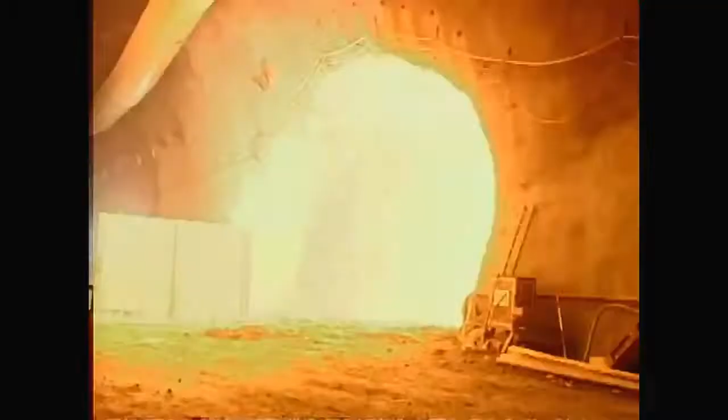The risky plan to redirect the crush of Europe's traffic and cargo not over the Alps, but under them. To do this, miners will have to punch their way through some of the hardest rock on Earth. It will take the largest drilling machines on this planet, each more than 3 stories high and longer than 4 football fields, drilling 24 hours a day for 6 years to get the job done.

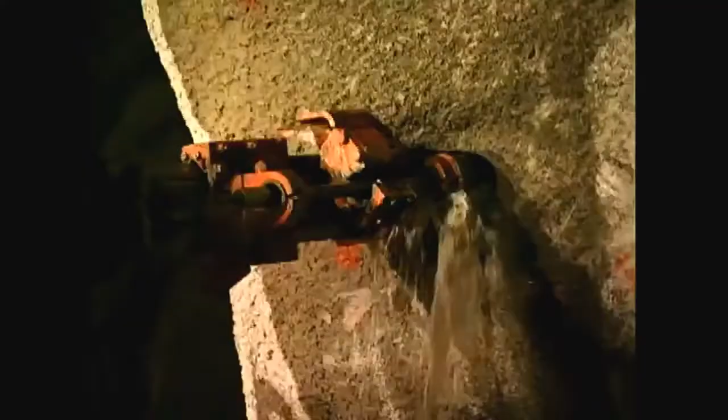The project is incredibly dangerous and outrageously expensive. The price tag, $7 billion. Can it be done? Or will unforeseen problems bankrupt the project before it's finished? Will engineers be able to avoid the horrible fate of so many other tunnels? Fire, disaster, and death.

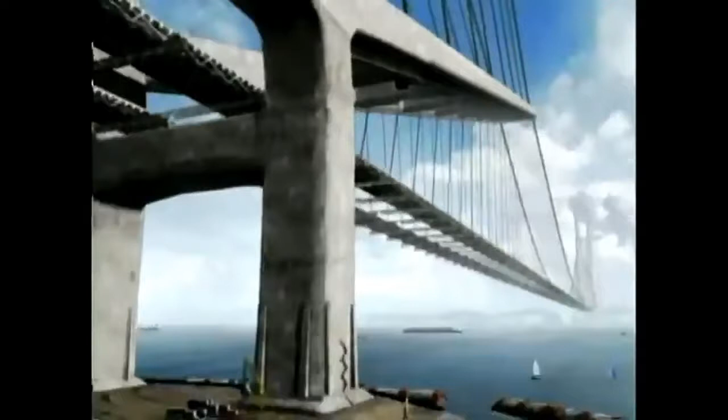To the outside world, Switzerland is a picture postcard. But the reality is not so pretty. Because of Switzerland's central location, each year 14 million trucks and cars coming from every corner of Europe pass through Switzerland on their way elsewhere. The sheer volume is fast turning this country into the biggest traffic jam in the world.

An obvious solution: put more freight and passengers onto trains to reduce the number of trucks and cars on the road. But it isn't that simple. The antiquated railway system is already jammed to capacity. In 1998, Swiss voters decided that something had to be done. So they voted to authorize a whopping $21 billion for a mammoth project. A high-speed rail network to be built under the Alps, connecting Switzerland to the major cities of Europe.

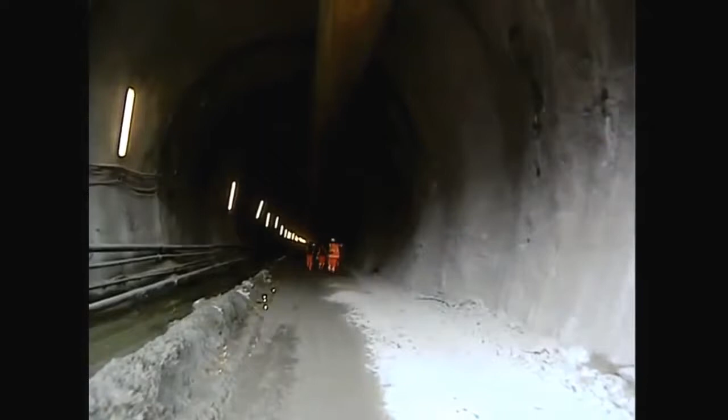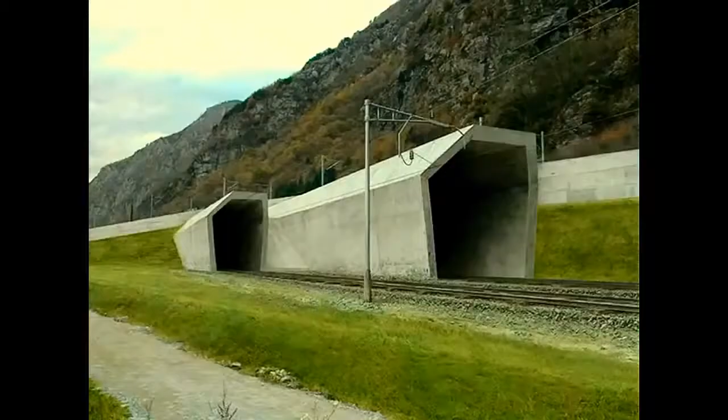The scale of the proposed project was staggering. It would require 2 separate tunnels, each one far longer than any mountain tunnel ever built. The shorter of the tunnels, named Lötschberg, would run for 21 miles under the mountains in southwest Switzerland. 50 miles to the east, an even longer tunnel would run 35 miles through the Alps. Since it would run directly under a mountain range named Gotthard, it would be called the Gotthard Tunnel.

3 times longer than any other mountain tunnel in the world, the Gotthard Tunnel alone will cost $7 billion. Enough to have built the Golden Gate Bridge 17 times. The tunnel's path will be straight and flat, right through the base of the mountain range. This route will let freight trains race through the mountain at 100 miles per hour, more than double their current speed. And passenger trains will go even faster, up to 155 miles per hour.

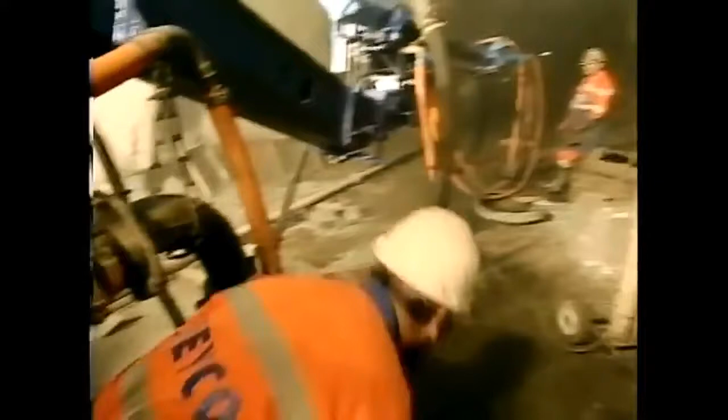Swiss voters were sold on the benefits of the proposed project, but they were also worried. They insisted that designers come up with plans to minimize the project's potentially devastating environmental impact. So the contract approved by the voters put enormous pressure on the engineers and the contractors. First, there was the guarantee. The engineers would need to certify that the tunnel would last at least 100 years. That meant that literally every material used in the tunnel would need to be subjected to the most rigorous testing in history. But that wasn't all.

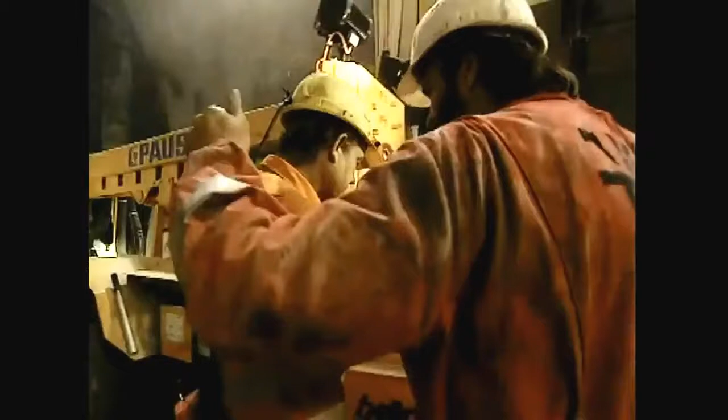The contract also called for the tunnel to be built fast. And if the builders made mistakes that put the project behind schedule or over budget, they would risk paying stiff financial penalties. We're not allowed to forget cost and time scheduling. Those are very risky things. We just got to keep all of that in control, and everybody's just really aware the whole world is watching us, and we've got to get everything right.

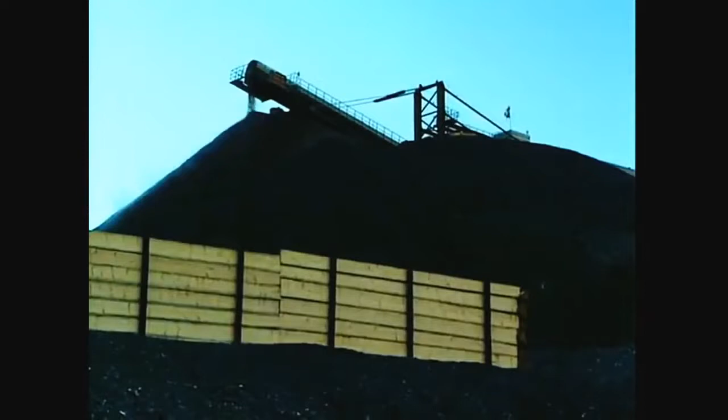Even without these added pressures, the Gotthard Tunnel project would still seem like an impossible task, just from the scale of the work itself. The miners will have to dig 24 million tons of rock out of the Alps, an amount that would fill over 16 football stadiums. Working conditions are extreme. Because the tunnel lies so deep underground, temperatures inside can reach 115 degrees. The miners work in near darkness and breathe thin, dusty air.

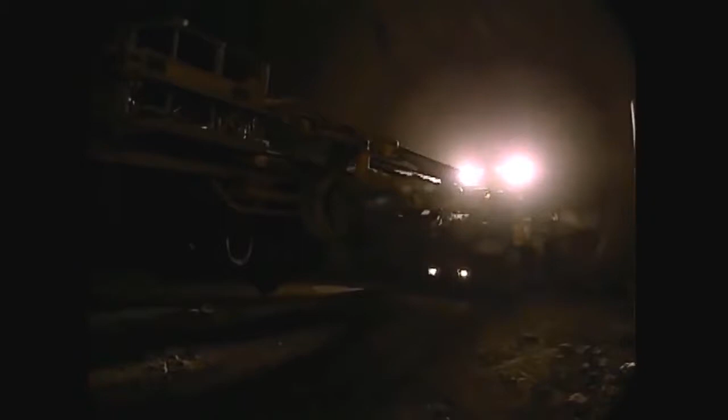Every day, they put their lives on the line. The biggest danger is lack of oxygen. In case of emergency, fire, explosion, the first thing that goes is the oxygen to breathe, because we're underground. We've got dumpers, we've got excavation machinery that move back and forwards. They're just moving around all the time. It's dark. Drivers don't see people walking around behind, and it could be if they reverse out that somebody gets hit by machinery.

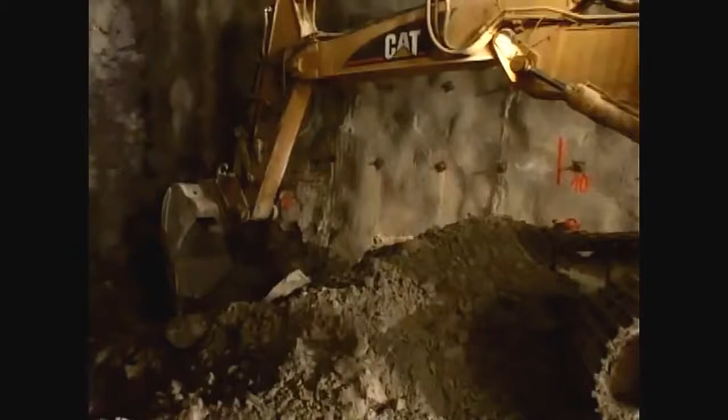And the dangers don't stop there. Tunneling, after all, is a battle between man and the earth itself. Cave-ins are a constant threat. To minimize the risk, geologists take samples deep inside the mountain before any drilling begins, to find out just what kind of rock the drillers might encounter.

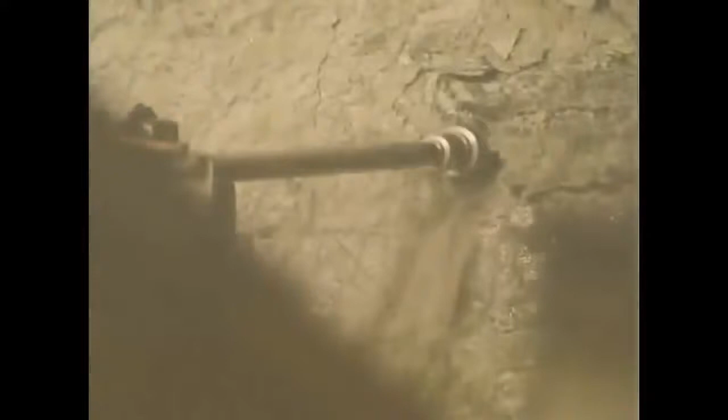A lot of sections we have rocks like this, real hard, gneiss, granites, where we go through by a tunnel boring machine. The tunnel boring machine, or TBM, designed for the Gotthard Tunnel, can chew away at hard rock. But if the miners encounter soft or unstable areas, they have to use a different method. The rock must be drilled and then blasted out.

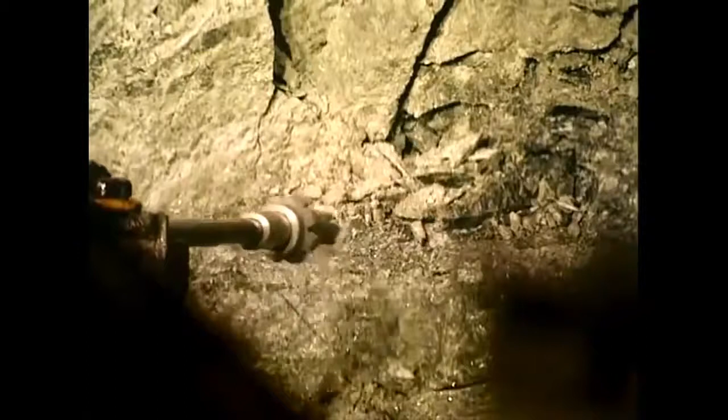And in areas where there are high-pressure water zones and crumbly rock, none of these methods can be used, and the danger increases exponentially. In 1996, during the initial surveys, geologists discovered such an area, sitting near the path of the proposed tunnel. The geological team taking core samples got hit by a sudden, powerful explosion of sand and water.

It's like you're in a submarine, 3,000 feet under sea level, and you drill outside into the sea. You hope that the water doesn't come into the submarine. So it's really life dangerous. Fortunately, no one was killed in the accident. But the incident threatened to stop the project in its tracks.

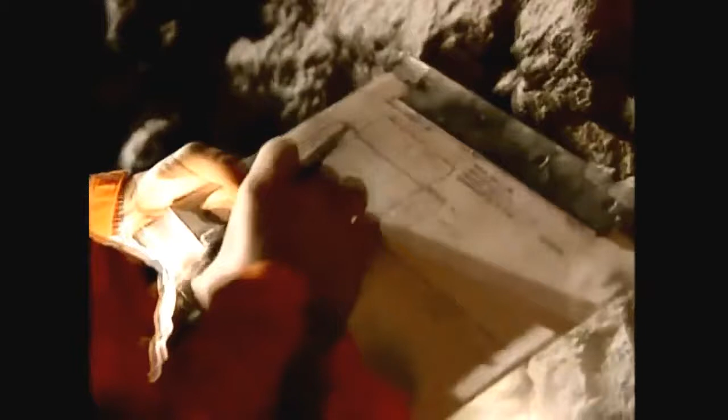The engineers estimated that stabilizing the area would cost an extra $600 million. That money simply wasn't in the budget. It took another half year of drilling deeper down before the geologists found a route that avoided the danger zone. And then we found a totally different rock. We found a marble. So this is not a difficult rock, so we can go through by TBM.

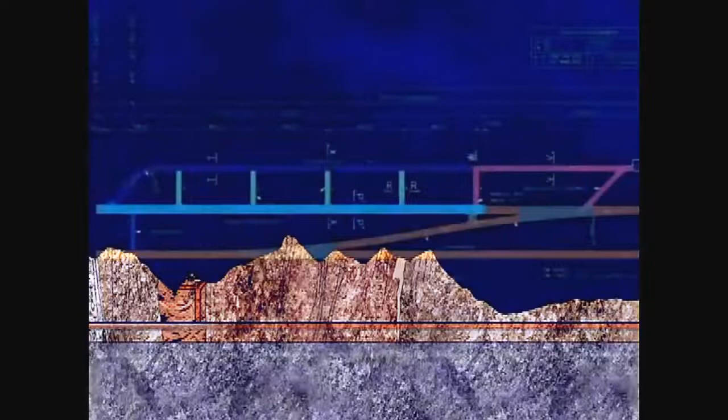Now that a safe path through the mountain had been determined, the design team could move on to their next big decision. What would the tunnels themselves look like? A single large tunnel with 2 sets of tracks inside would be the cheapest solution. But this design had a fatal flaw. If a train derailed inside the tunnel, it could hit an oncoming train or block the tunnel in both directions.

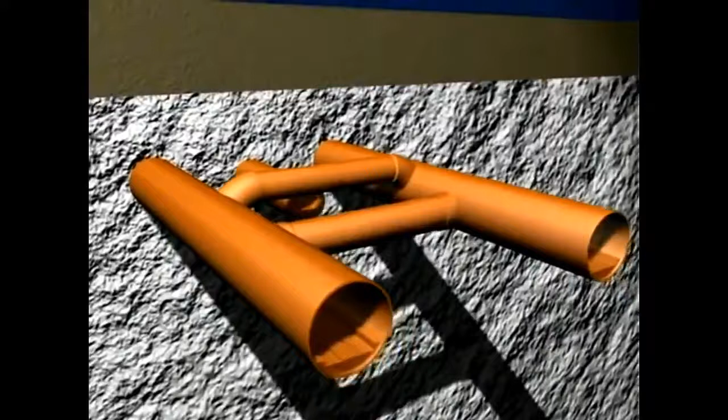A safer alternative would be the 3-tube system, like the one used in the Channel between France and England. The Channel has 2 single tunnels, one for each direction, and a smaller central tunnel for emergencies. That third tunnel proved a lifesaver on November 18, 1996.

That evening, a train carrying several trucks entered the tunnel on the French side. The conductor was unaware that one of the trucks had somehow caught on fire. At the time, there were 6 trains in the tunnel, including 2 passenger trains. 12 miles inside, the conductor brought the burning train to a dead stop.

He tried to get the passengers out, but the smoke was so thick they could barely see the exits. Eventually, they were able to make their way to the safety of the central emergency tunnel. They were very lucky. The fire was so intense in the tunnel they had left, it melted part of the concrete lining. 2 people suffered serious smoke inhalation. But thanks to that central emergency tunnel, nobody died.

The lesson was clear. Tunnels will always be dangerous places, but a good design can reduce the risks. You will never get a completely risk-free tunnel. You have to design it to cope with the foreseeable risks that might be faced. But at the end of the day, there are certain things called emergencies in which you have to have an emergency plan, whatever the situation you have.

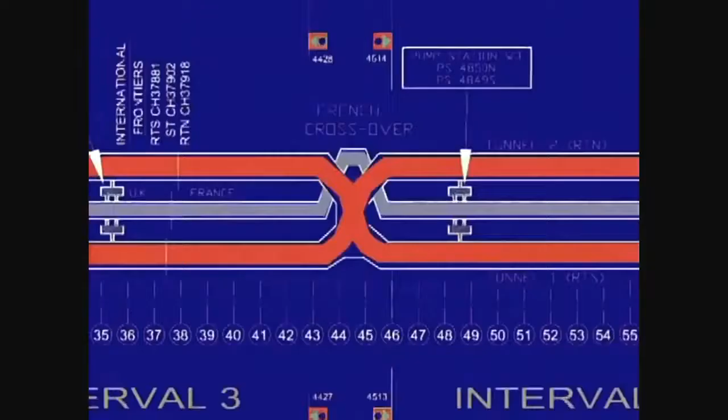The Swiss engineers carefully considered the pros and cons of each design. The single-tube system was clearly too dangerous, but the 3-tube system was far too expensive. So they came up with something else, a double-tube design. Separate tunnels going north and south that would reduce the risk of a head-on collision.

To enhance safety, they added passageways every 1,000 feet. These would allow emergency crews to move between both tubes. 2 crossover points along the track would allow trains to switch from one tunnel to the other in an emergency. The designers added another crucial feature, a series of small passageways connected to an escape route that crosses over to the other side. Each tube would have 2 of these emergency stations.

If a fire were ever detected, the computers in the command center would guide trains directly to the closest emergency station. Passengers would then evacuate the train and make their way to safety. A pair of massive ventilators at the portals would bring in fresh air and push out the smoke. On paper, this is perhaps the safest railway tunnel ever designed. But until it's tested, no one will know for sure.

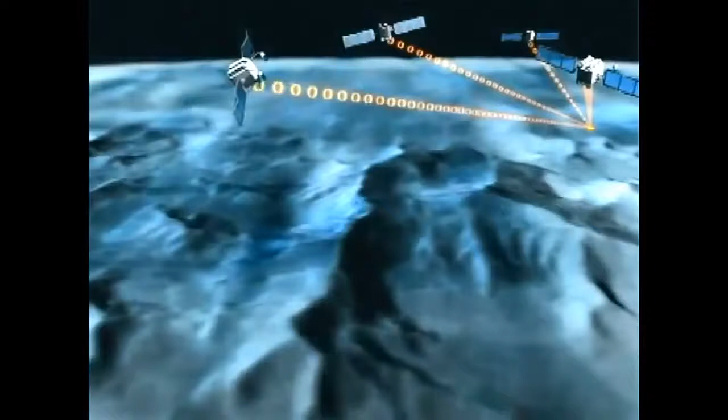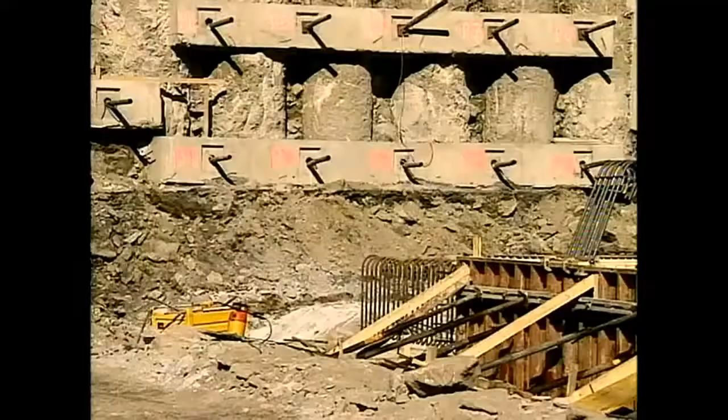The plans were complete. Now the real work could begin. Base camps were set up to launch the attack on the mountain. Because the job is so enormous, the engineers plan to enter the mountain from 5 distinct starting points. It's a new system or a new way to excavate such a long tunnel. It would have taken us about 20 years to meet up because it's so long. With these measures of attacking with 3 intermediate attacks, we've speeded up the whole excavation phase by about 6 to 10 years.

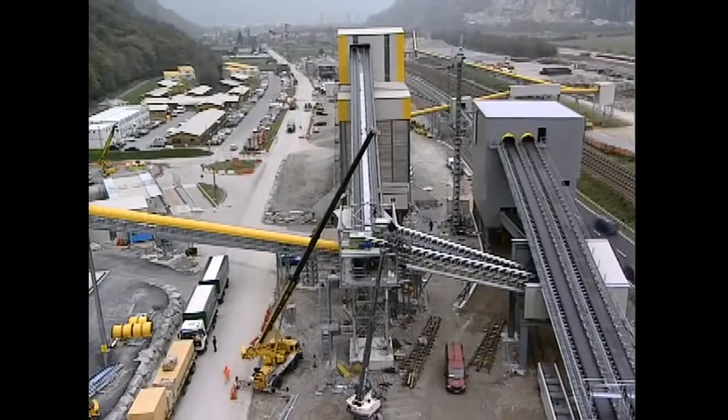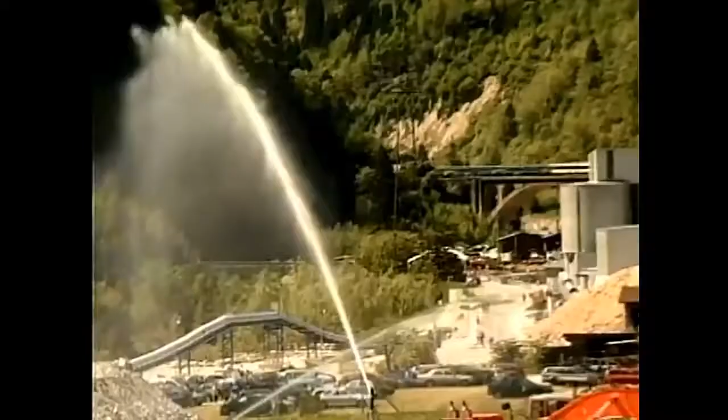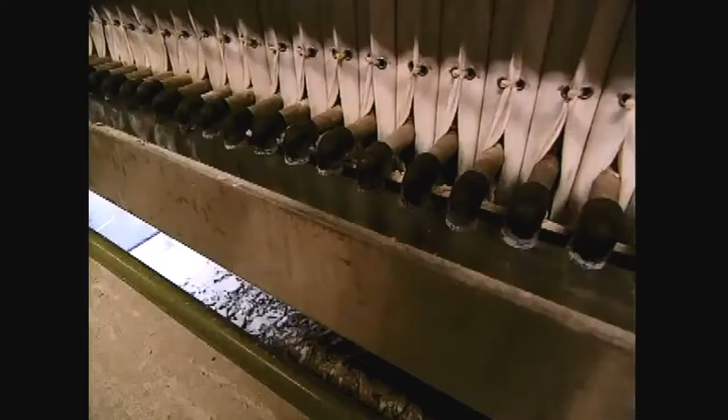Each starting point would have its own base camp, complete with concrete factory, water treatment center, living quarters for workers, cafeteria, even a mass transit system. The base camps would play a crucial role in keeping environmental damage to a minimum. A major concern was water. Drilling would contaminate huge quantities of pure mountain water that had been locked inside the mountain for millions of years. Water treatment plants at each base camp would filter out contaminants and then channel the water to nearby rivers.

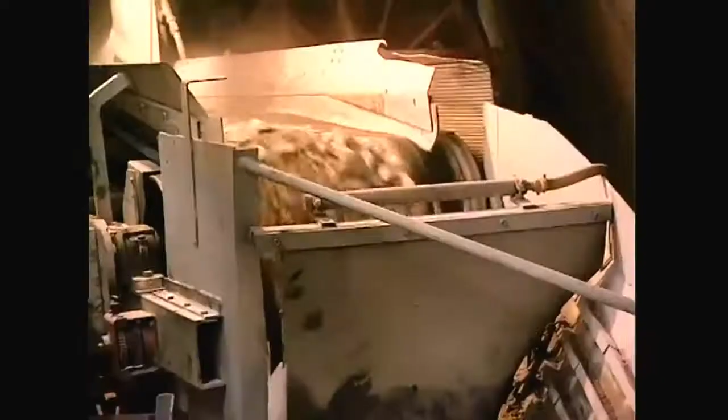But an even greater concern, rock debris. What could be done with the 24 million tons of rock the miners would carve out of the mountain? They came up with an ingenious plan. Recycle it back into the project. Concrete factories at each site would transform the rock to produce the 7.5 million tons of concrete needed to line the tunnel walls. That's enough concrete to pave an 8-lane highway 300 miles long.

Once the facilities were in place, project managers could start bringing in manpower. 1,800 workers were brought in from all over the world. Among them, the world's best technicians, explosive experts, and heavy machine operators. With the army in place, the full-scale attack on the mountain could begin. Their first task, build access tunnels into the rock. These tunnels are needed to get the workers and equipment to the actual work site deep inside the mountain. The workers would enter the rock in trains, buses, even an elevator.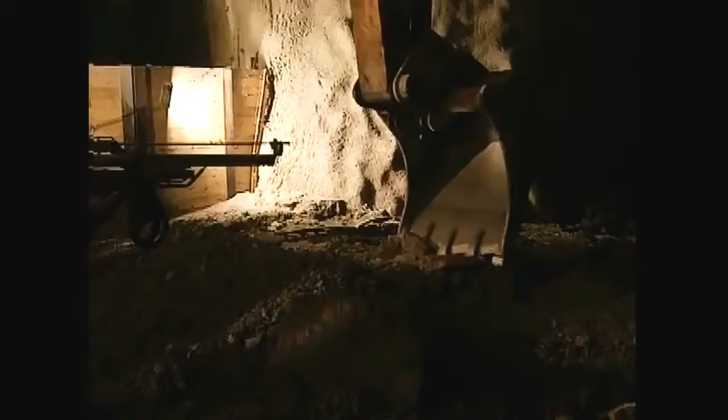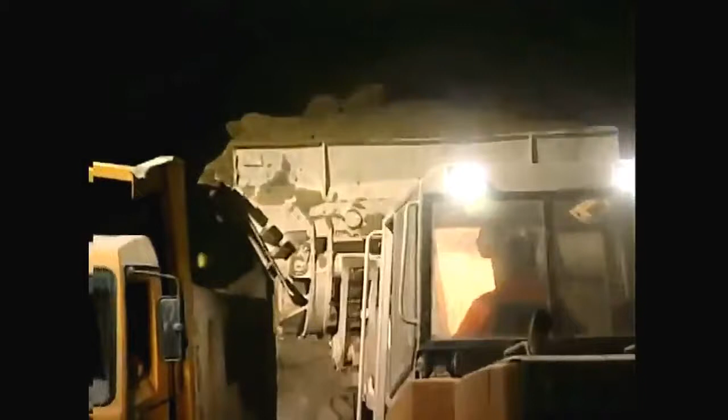The schedule required work to go on around the clock, 7 days a week, for 12 years. Drilling, digging, blasting. Just to make the deadline. But even at that pace, the project would be completely impossible without this. This is one of the biggest tunnel boring machines in the world. It's a drill with a drill bit 30 feet in diameter, designed to bore a tunnel through some of the hardest rock in the world.

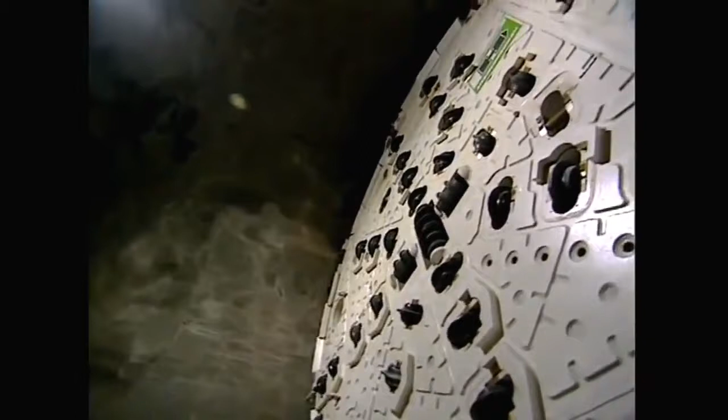How big is it? 3 stories high, 4 football fields long. At full throttle, it can advance through 130 feet of solid rock in a day. But even this gargantuan machine had never been tested under these conditions. Could it withstand 6 years of constant grinding? To improve the odds, the engineers had to arm the machine with the best possible weaponry, custom made for the job.

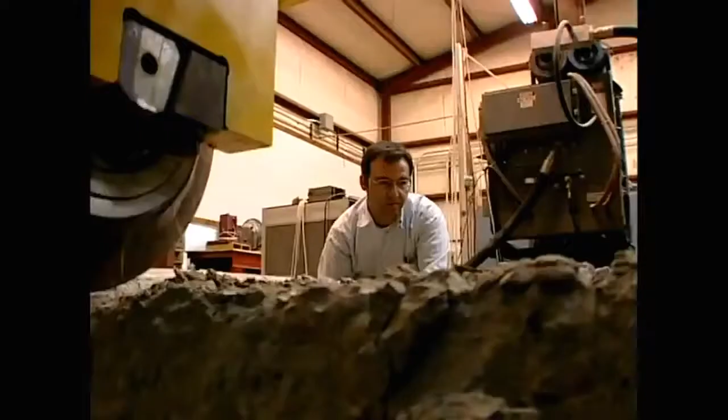The best custom drill bits for tunnel machines are designed here at the Colorado School of Mines. Looks like you are getting some overbreak over here. Where researchers test individual cutters, the steel alloy rollers that actually grind the rock face.

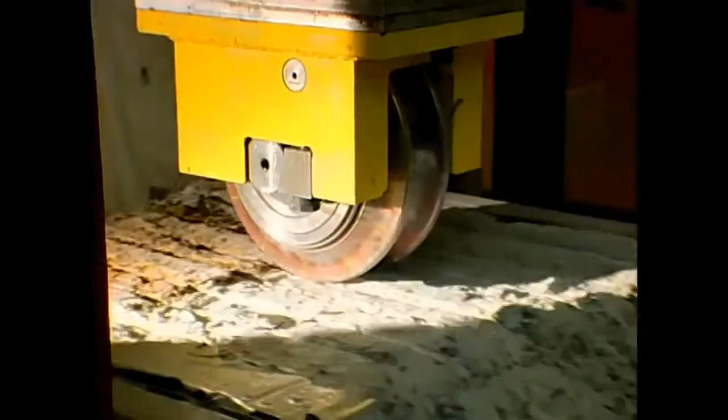To guarantee each cutter is best suited for its job, a rock sample from the tunnel site is placed on this machine. A cutter rolls over the rock again and again. The machine measures the force needed to cut through this rock.

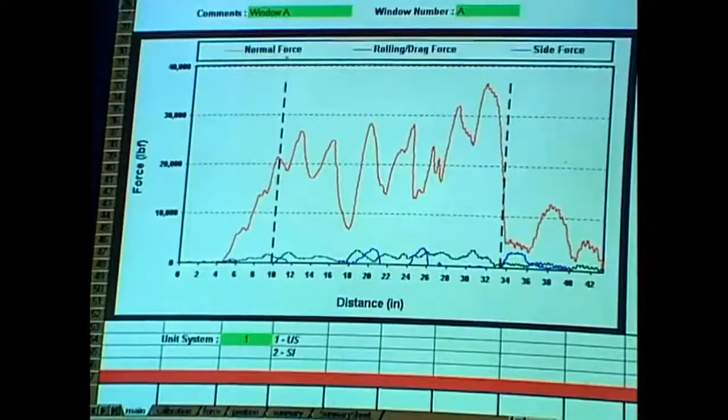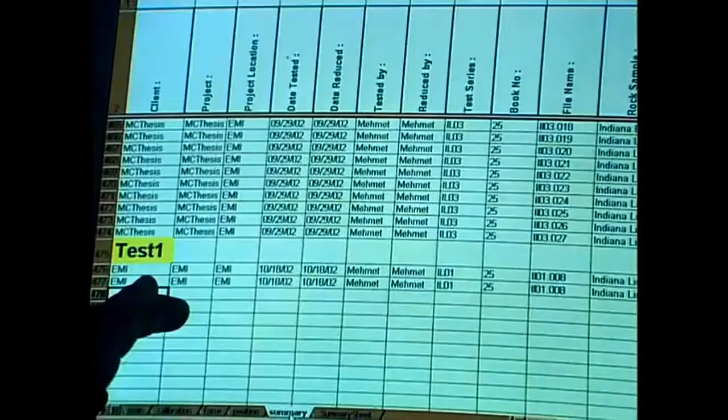The data we get from these tests allows us to design cutter heads that'll best match the tunnel boring machine to the rock being bored through, thus making the machine as productive as it can be or go as fast as it can. The testing is critical. If the cutters are not made right, they could wear prematurely and slow the project down.

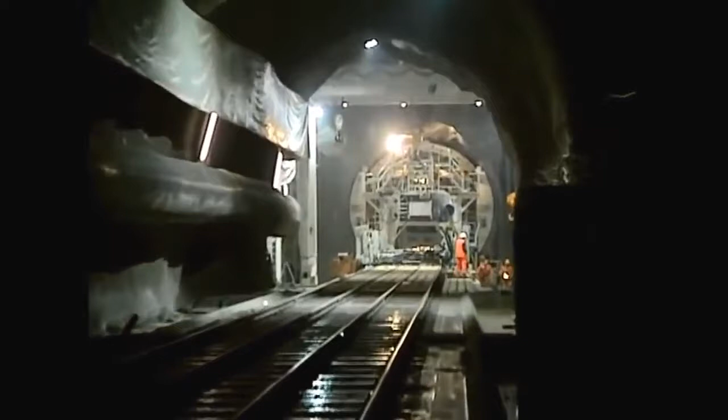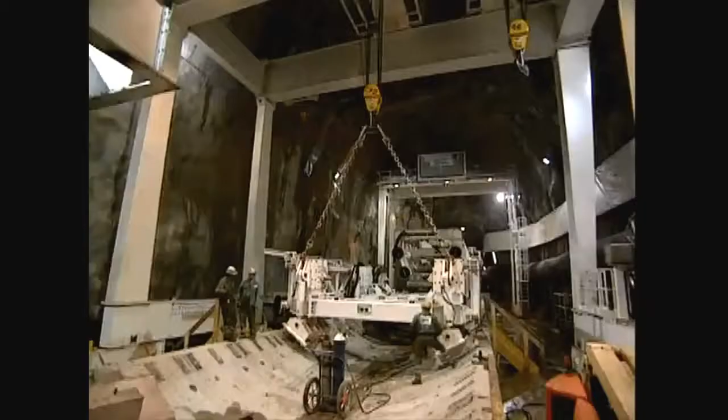58 of these cutters, each 17 inches in diameter, are mounted to the front of the boring machine's cutter head. The custom-designed cutter head was made in Germany and then shipped to the tunnel site back in Switzerland. It then took 3 more months for technicians to attach the cutter head to the machine. Meanwhile, the clock kept ticking.

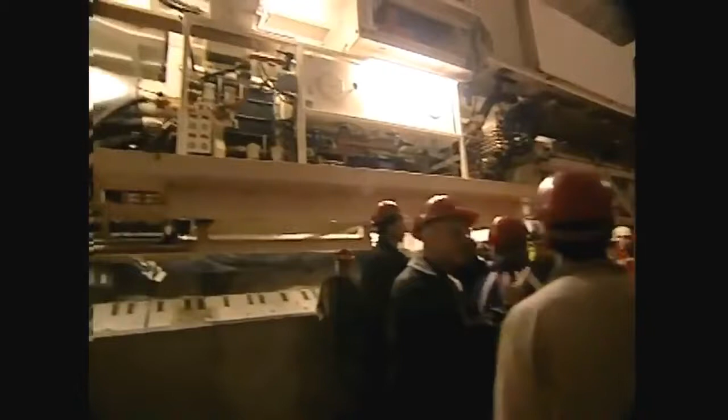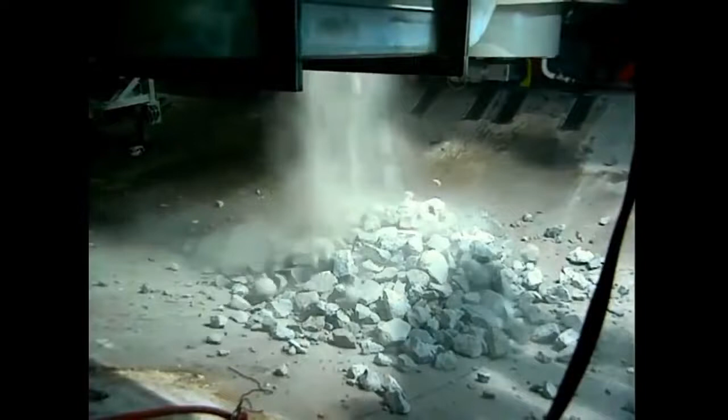In November 2002, the cutters finally had a chance to test their chops. It was a critical moment. Engineers, miners, and politicians gathered in the depths of the Alps to see if the giant would really work. They waited. Suddenly, the beast came alive. Its 3,500 kilowatt engine cranking out 4,700 horsepower. The massive cutter head turning, pulverizing the granite into tiny bits. Everyone breathed a gigantic sigh of relief.

Of course, the cutter head doesn't do the job alone. The Gotthard's tunnel boring machine is a complex marvel made up of 90,000 parts. Aimed precisely in the direction of the tunnel to be, a pair of gripper pads is pressed against the rock, locking the boring machine in place. The powerful hydraulic arms attached to the gripper pads push the cutter head forward, driving it into the rock.

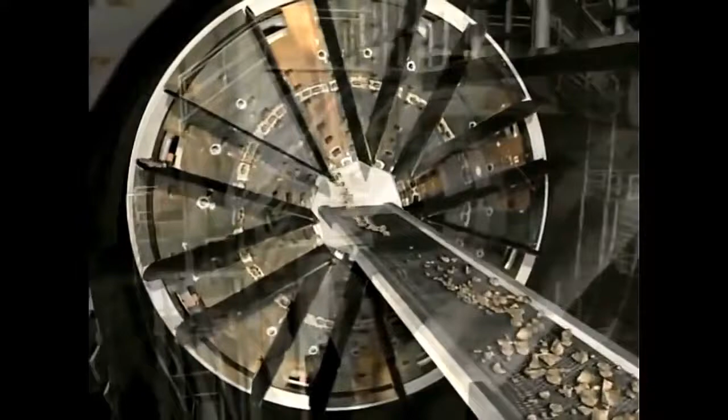The cutter head turns counterclockwise, crushing the rock into small chips with its 58 cutters. Each cutter can exert 26 tons of force. That's like 58 cars simultaneously hitting a rock wall at 26 miles per hour. As the cutter head grinds, the small chips fall into a set of rotating buckets. The buckets deposit the chips onto a conveyor belt, which shuttles them out of the tunnel and onto the concrete processing plant.

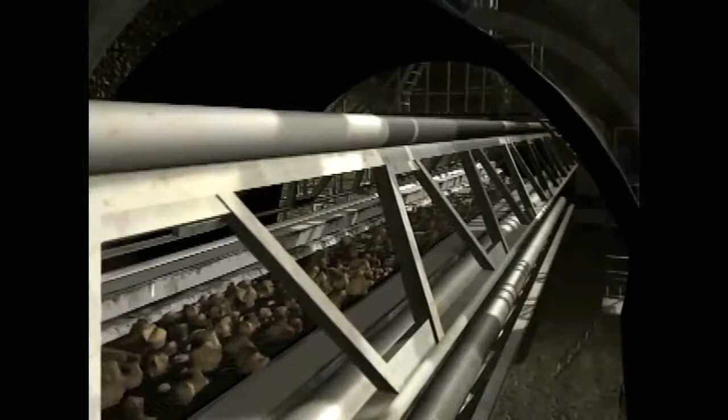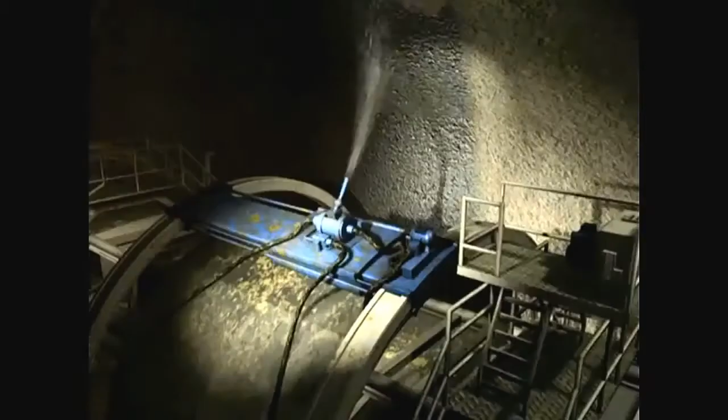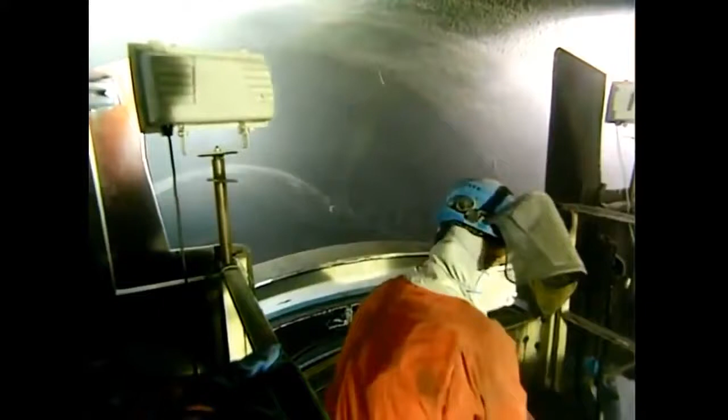65 yards behind the cutter head, a robotic arm sprays every square foot of new wall with a liquefied concrete called shotcrete. In a matter of seconds, the shotcrete dries, hardens, and binds to the tunnel walls. It provides a tough inner skin, which is added insurance against cave-ins. After every 7-foot advance, the workers must stop to reposition the grippers, and the process starts all over again.

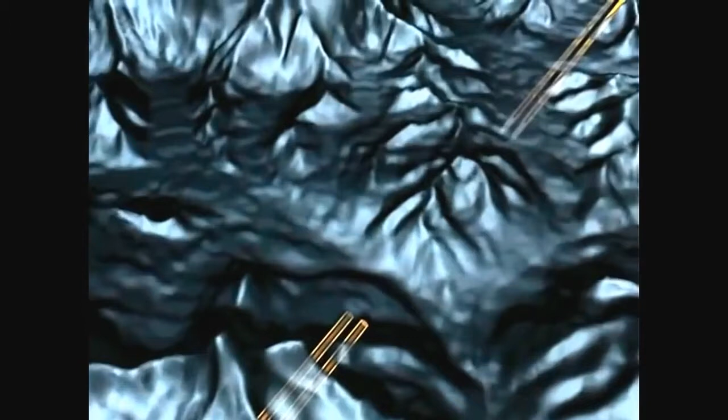The project is so massive, and the schedule so tight, the job requires not one, but 6 of these $21 million tunnel boring machines. One pair bores north from the south entrance, while a second pair grinds south from a midway point. Then, a third pair of machines will start at the north entrance and drill south toward the midway point. If all goes as planned, the big machines will finish their part of the job in June 2009.

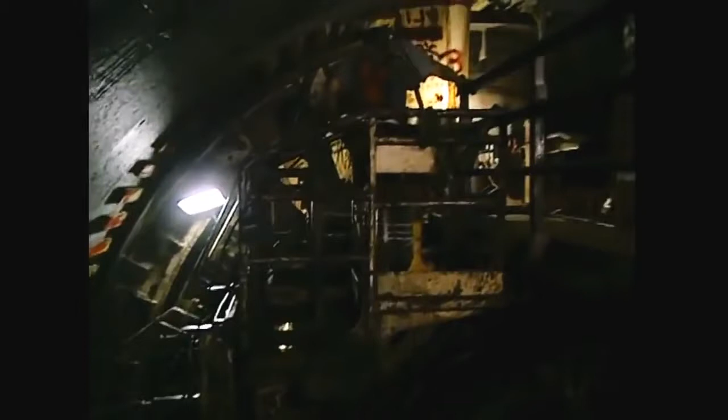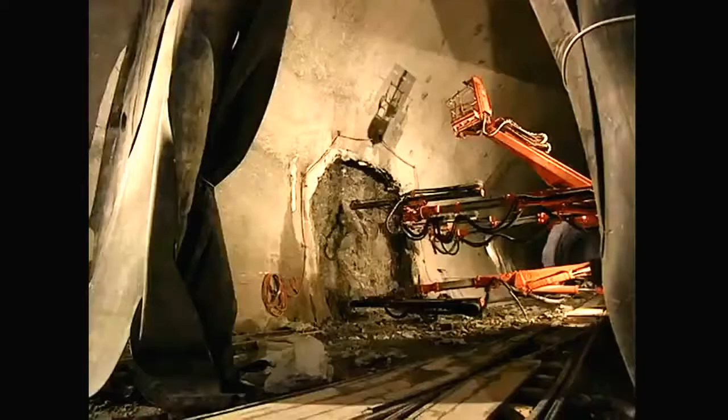But there are plenty of unknowns. And as powerful as the boring machines are, there are some places in the tunnel where they can't be used. That's because these machines can dig only straight and only through hard rock. But the Gotthard Tunnel will pass through a few areas where the rock turns soft or is broken and unstable. The risk of a cave-in is simply too high in these spots to use the machine. So they have to be dug out the old-fashioned way, by drilling and blasting.

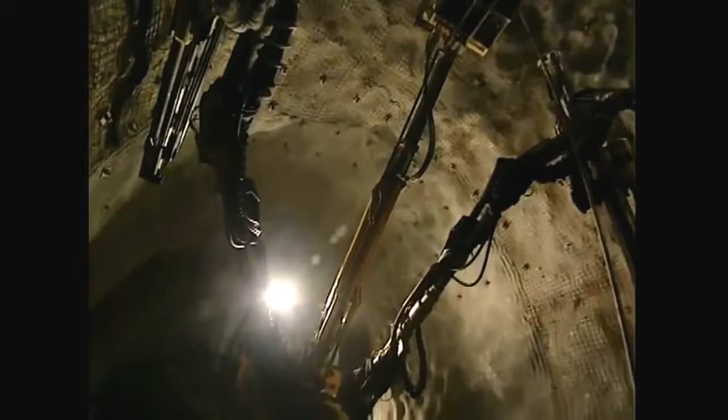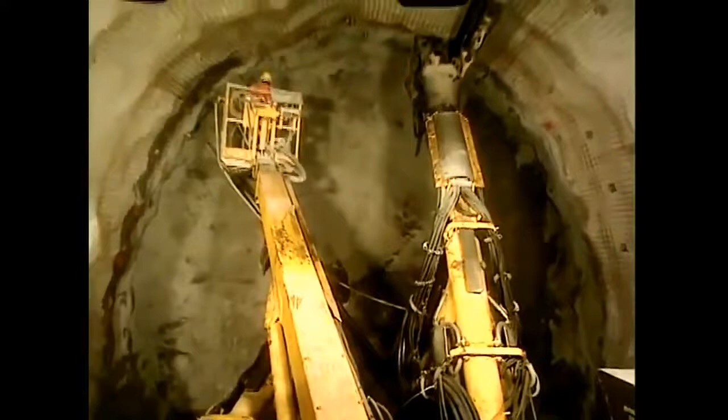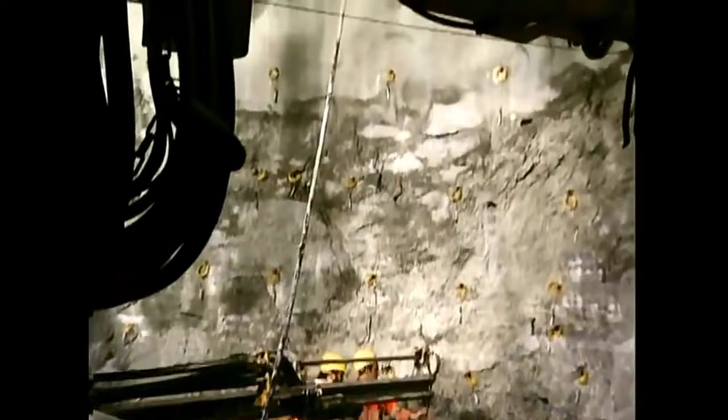This machine is called the rocket boomer. It's a huge rock drill, capable of choreographing an explosion so potent it can remove a perfect circle of rock up to 19 feet thick. First, a technician uses a laser beam to align the drill. Next, the rocket boomer's computer calculates the blast pattern that will deliver the most bang for the buck. Then the drilling begins. Over 80 holes, up to 19 feet into the rock.

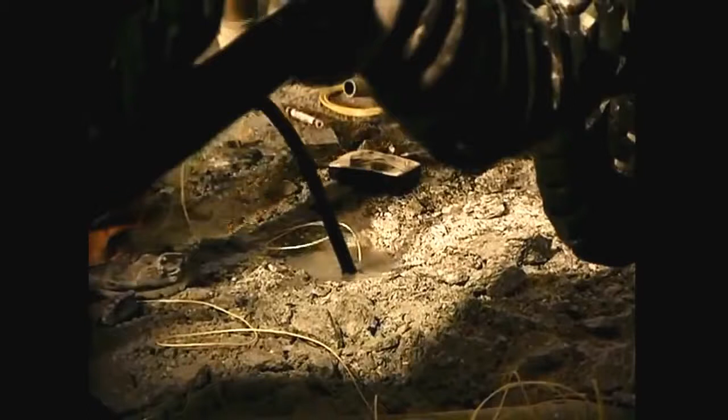Into these holes, a technician pumps precisely measured doses of 2 different chemicals. Each chemical on its own is completely harmless. But if the recipe is right, together they will become a volatile cocktail. To ignite the explosion, the technicians insert an electrical detonator into each hole. With all the leads linked together, a jolt of electricity sets off a massive blast.

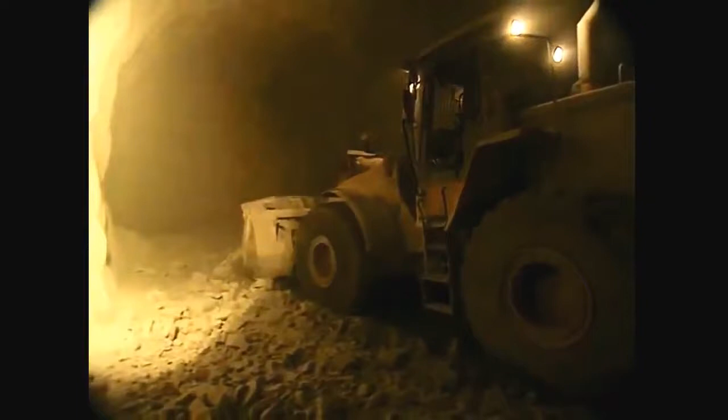Once the dust settles, the rubble is shoveled out. A single blast like this takes 8 hours to pull off. Their workday done, the blast team now makes way for the next shift, who will prepare the next blast.

Each day, on every front, the workers fight to advance into the rock as far as they can. The drilling team leads the way. They're backed up by a second unit, following closely on their heels, performing another crucial part of the job: building the concrete lining of the tunnel.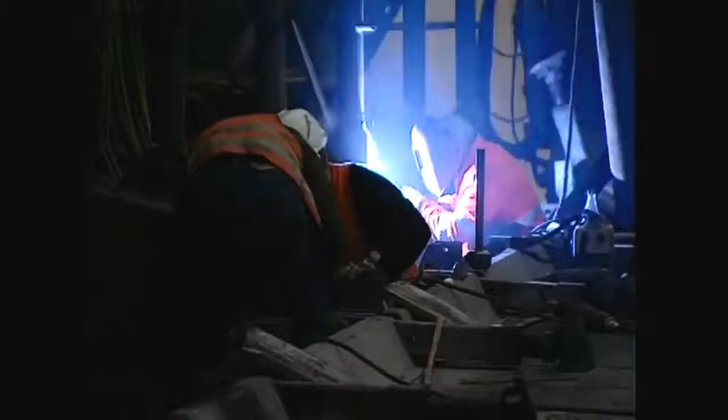50 miles west of the Gotthard, the drilling team working on the 21-mile-long Lötschberg Tunnel has almost completed the digging phase of the project. They've also already sprayed the tunnel walls with a layer of shotcrete, the liquefied concrete that stabilizes the rock as it dries. Now, the tunnel is almost ready for its final concrete lining. First, it must be carefully prepared.

At this stage, water is the enemy. Groundwater is always seeping through the rock and must be drained away. If not, water pressure can build up and literally push in the concrete lining of the tunnel. To prevent this, the team applies an ingenious system of layering to the shotcrete wall.

The first layer is a white plastic webbed mesh. The water trickles down the mesh into a drainage system at the bottom of the tunnel. A second layer of solid plastic sheeting seals off any remaining water behind it. This should make the inside of the tunnel waterproof.

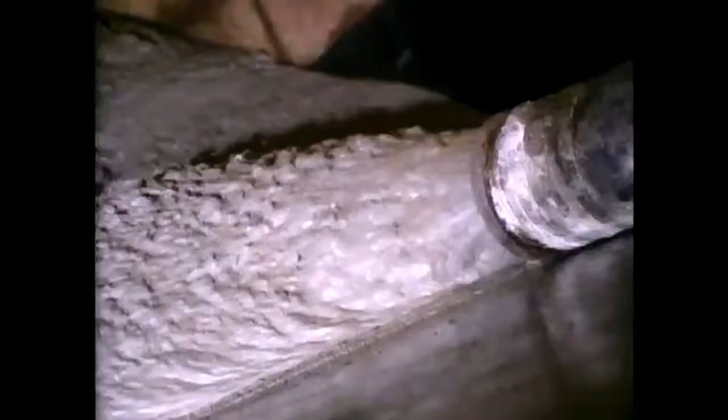Next, huge metal forms are put into place. And then, concrete is injected behind them. As the concrete dries, engineers keep water running over its surface so it won't crack. When the metal forms are removed, the smooth, final concrete lining is left behind.

Of course, the concrete used in these tunnels is no ordinary concrete. The designers have guaranteed that the tunnels will last at least a century. So everything that goes into the tunnel has been put through the most rigorous testing in the industry. And that's done here, at the most advanced tunnel testing facility in the world, the Hagerbach Test Tunnel, 40 miles northeast of the Gotthard.

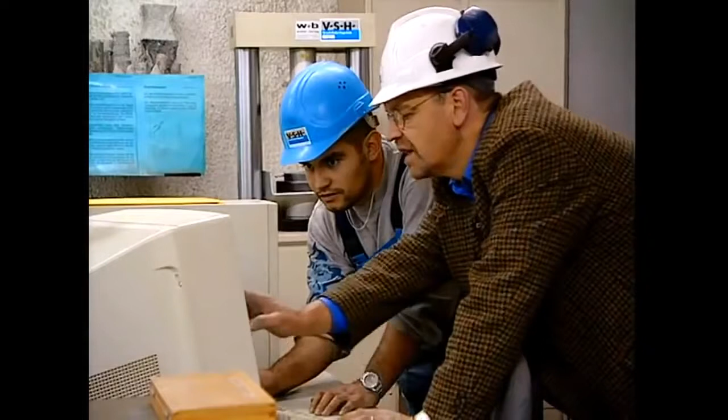The Hagerbach test site is a labyrinth of tunnels crisscrossing and stretching 2.5 miles into the mountain. Here, engineers must test and approve everything used inside the Swiss Alp Tunnel project.

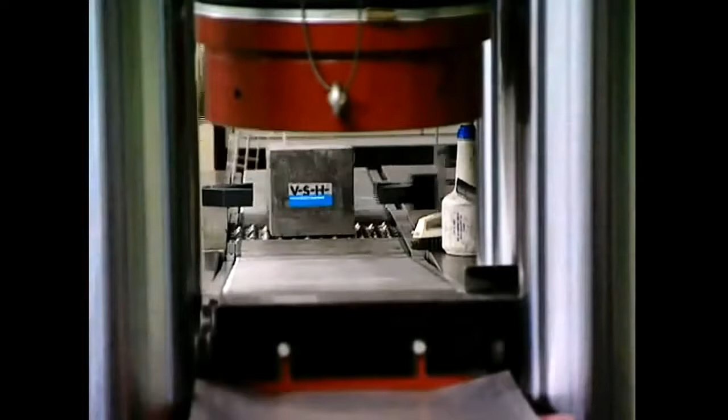In this laboratory, engineers subject concrete blocks to extreme pressure. The concrete lining has to hold up under the mountain's weight as the rock settles. When the deformation and the forces are too high in such a tunnel, then you have some cracks in the lining, or the worst case is that the lining can break down.

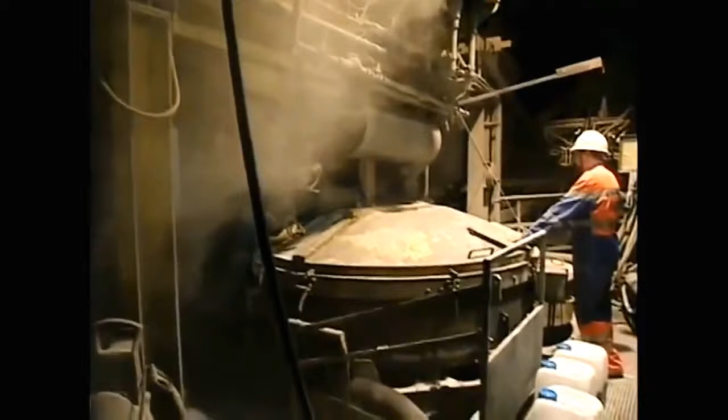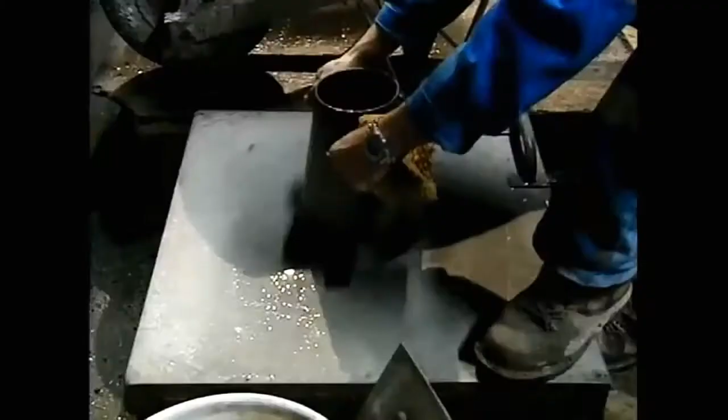Here, engineers are fine-tuning a shotcrete recipe. A mix of sand, gravel, water, and cement that is sprayed onto the tunnel's bare rock walls. The precise ratio of ingredients is crucial. Too little water, the shotcrete will be too thick to spray. Too much water, it will be too weak. Shotcrete also must be able to withstand extreme hot and cold temperatures.

In this area, engineers are testing explosives. Different types of rock need different formulas. Because the Gotthard Tunnel has extremely hard rock, they need an explosive with a lot of kick.

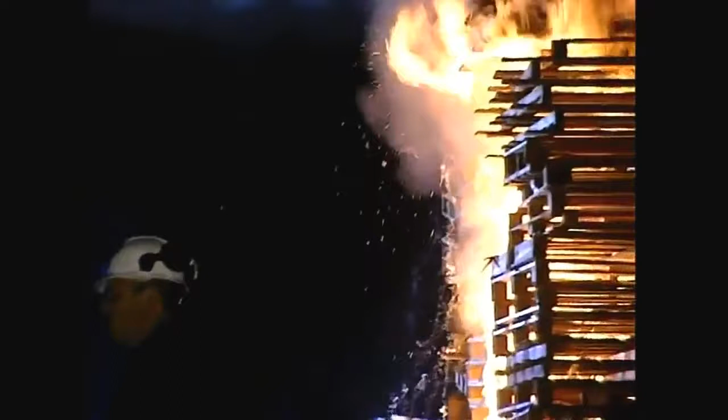These tunnels are also used to test people, to prepare them for disaster. Fire is one of the biggest dangers in a tunnel. Using wooden crates and gasoline, the engineers simulate a common tunnel accident scenario: a truck on fire. In just a few minutes, the fire is a raging inferno.

In a fire, a tunnel acts just like an oven. Temperatures can exceed 2,000 degrees Fahrenheit, hot enough to vaporize human flesh, even concrete. So firefighters have to be trained to move fast to knock down any blaze.

Tunnels are also dangerous because they're cut off from air and light. Emergency crews can find their access blocked. The longer a tunnel, the longer it could take to get out if disaster should strike. And that happens more frequently than most people realize.

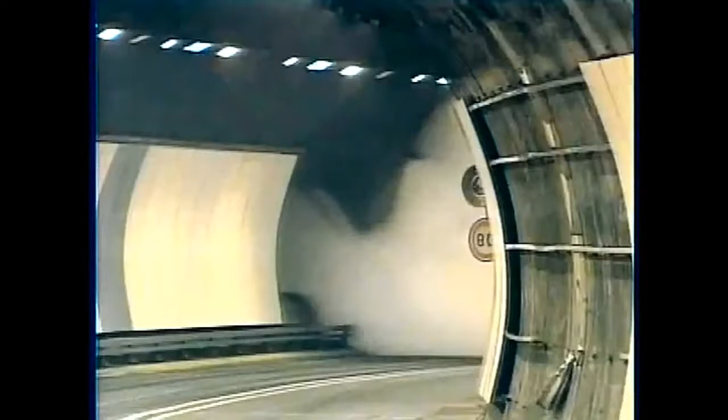March 24th, 1999 started out like any other day. At 10:45 a.m., cars and trucks were speeding into the Mont Blanc tunnel between France and Italy, unaware of what was about to engulf them. About 4 miles into the tunnel on the French side, a truck driver noticed smoke pouring from the back of his rig. He pulled over, but within seconds, his truck was completely consumed in flames.

Unfortunately, the ventilation system was no match for the smoke. It was so thick, it took emergency crews an entire day just to reach the blaze. The fire burned for days. When it was all over, 39 people were dead. Temperatures inside the tunnel had reached 2,300 degrees, melting sections of the concrete lining. The disaster forced a major redesign of the tunnel's emergency systems.

Learning from previous accidents or incidents is absolutely vital. It is one way that you understand how incidents occur, why they occur, how they develop, how people reacted to the incident in any one case, what worked well and what didn't work well. In this case, the lessons were learned the hard way. So engineers were determined to get things right the next time around.

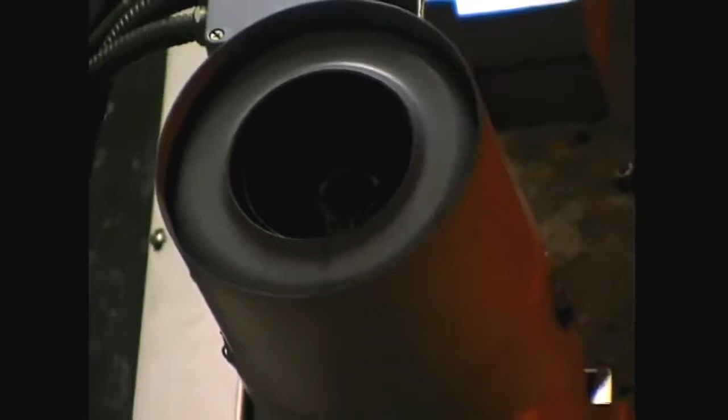First, they added 76 high-powered fans to blow out smoke and bring in fresh air. They set up fire stations inside the tunnel so crews can get to the fire quicker. Now, heat sensors at each entrance scan all trucks for overheated engines. 120 cameras linked to command control centers monitor traffic around the clock.

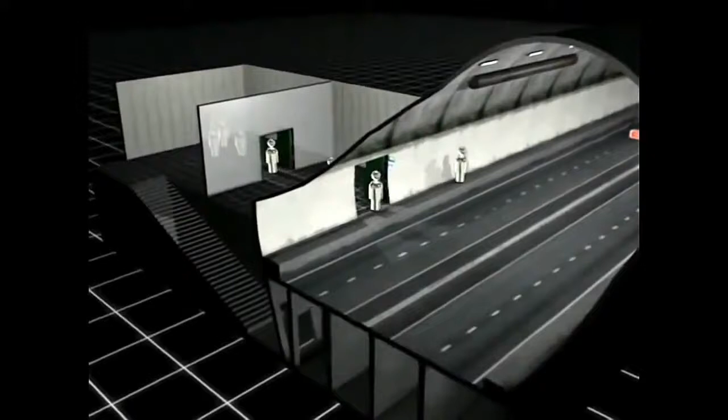The number of emergency shelters was doubled. There are now 37, placed every 1,000 feet, running the full length of the Mont Blanc tunnel. Every shelter has a direct phone line to the central control room. And the engineers added something new, a way out of the tunnel. Inside each shelter, a stairway leads to a passageway below the main tunnel. In a disaster, emergency crews would be waiting there to take the drivers out.

The redesigned Mont Blanc tunnel is considered one of the safest in the world. But even with all the new features, there will always be a risk. No tunnel is 100% safe. Fires occur in tunnels simply because there is flammable material and sources of ignition. And you will never eliminate those completely.

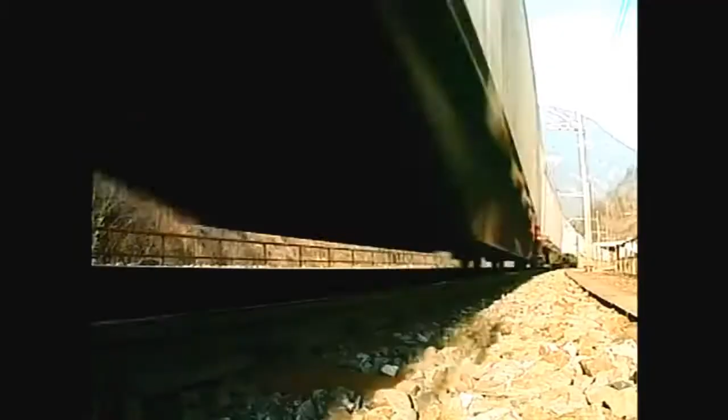The risk of a fire haunts the designers of the new Gotthard Tunnel. Some freight traveling through it will be lethal. Volatile fuels and chemicals that could catch on fire, or even worse, explode. The year is 2015. The new high-speed rail through the Gotthard Tunnel is a huge success. Just as the designers had predicted, the roads now run free of traffic jams.

But today, things could change. A small fire has just erupted on a freight train also carrying passengers. No one on board sees the fire. And the train is carrying a dangerous cargo of highly flammable fuel. 12 miles inside the tunnel, a passenger suddenly notices the smoke and alerts the conductor. The train's only hope: make it to an emergency station.

The conductor knows that a massive explosion could happen any minute. If he can't evacuate his passengers, all of them will likely perish. In the command center, alarms sound. Emergency crews are dispatched to the scene. But now the train is 15 miles in. The tunnel continues to fill with thick, poisonous smoke. The conductor sees the emergency station up ahead.

And if the engineers get it right, the new Gotthard and its sister tunnel, the Lötschberg, may become models for a new generation of high-speed rail tunnels, showing other nations how to transcend the highest barriers that nature has created, from the Rockies to the Himalayas.